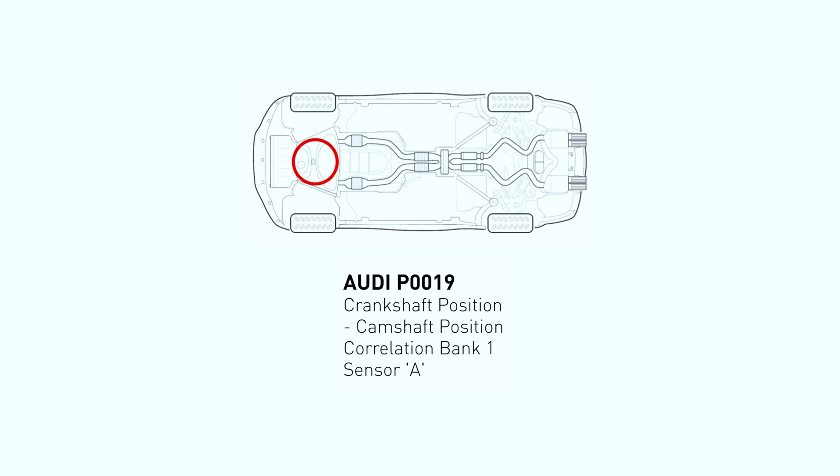Use the OBD2 scanner to scan your vehicle and see the error code P0019. It indicates that the camshaft position sensor A for bank 1 does not correlate to the signal from the crankshaft position sensor.

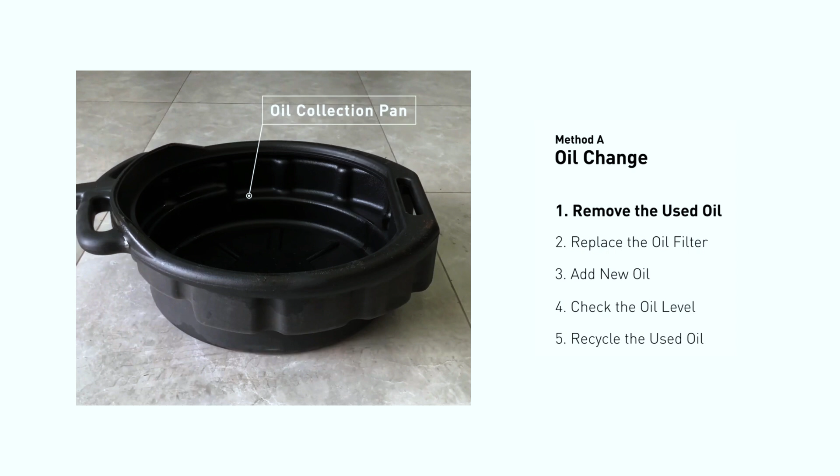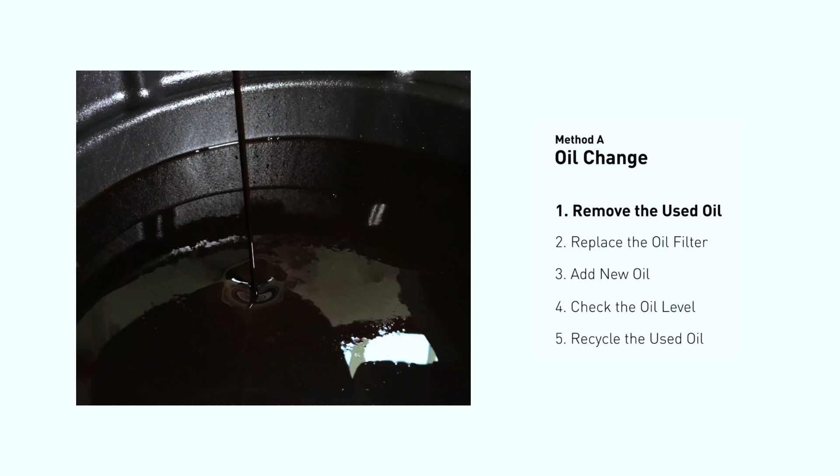Method A, oil change. Locate the oil drain plug on your vehicle and place an oil collection pan underneath it. Use a socket ratchet to remove the plug from the oil pan on your vehicle. Once the plug is removed, the oil should start flowing out into your collection pan. Once all the oil is drained, replace the drain plug and tighten it back on.

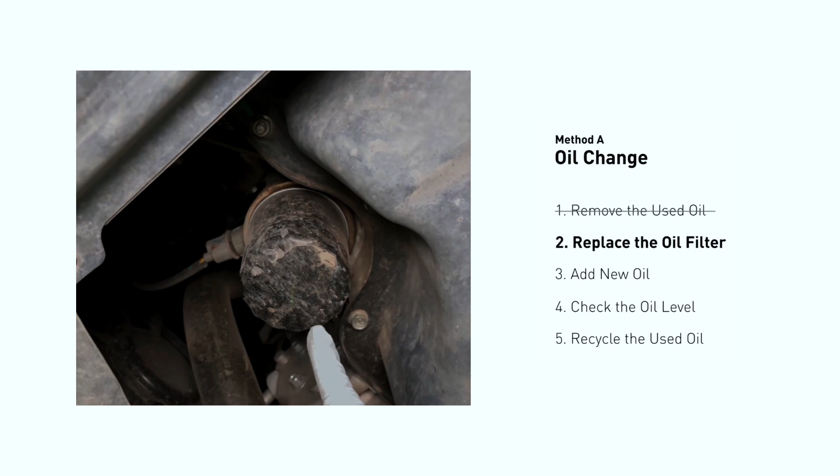The oil filter is usually located beside the oil pan or under the hood of your vehicle near the engine. Place the collection pan under the filter. There would be oil in the filter itself that could be hot, so it is important that the oil goes into the collection pan. Spread a bit of fresh oil evenly on the new filter's gasket, then install the new oil filter. Tighten the filter an additional 3/4 of a turn. Be sure not to over-tighten.

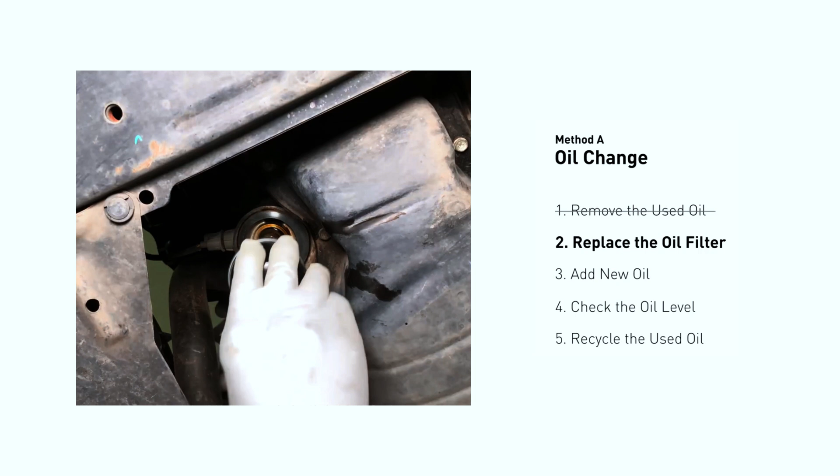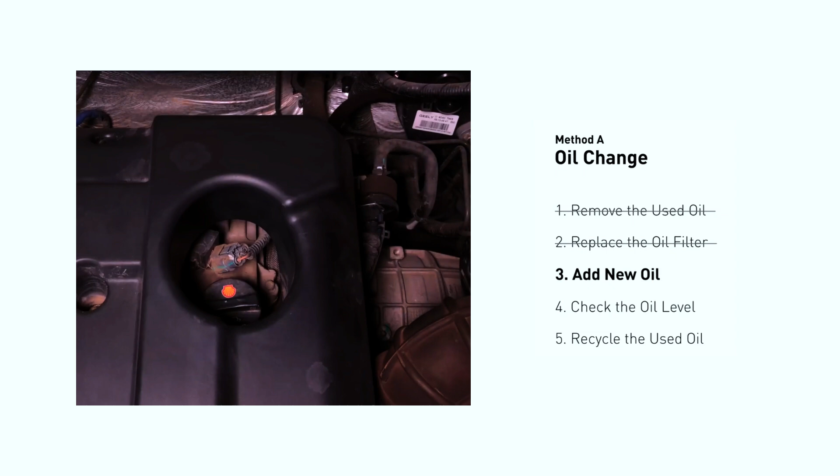To fill the vehicle with fresh oil, you should first locate your oil fill cap at the top of the engine. Clean the cap before removing it. Take the cap off and place the funnel into the opening. Add the amount of oil specified in your owner's manual, and then replace the cap.

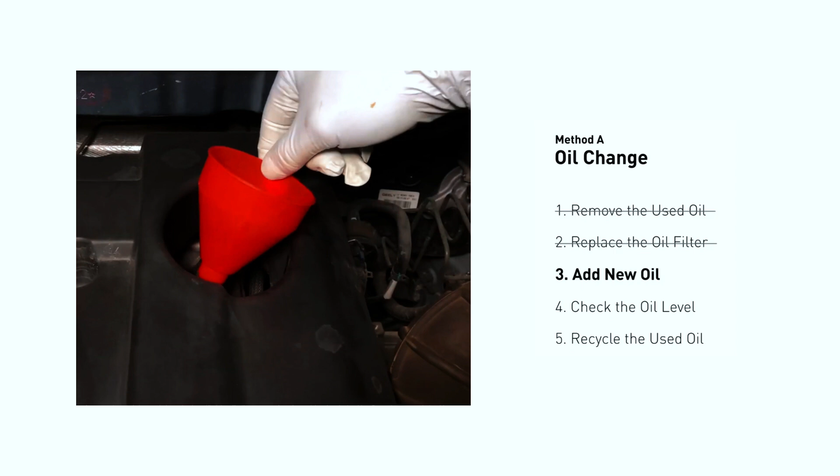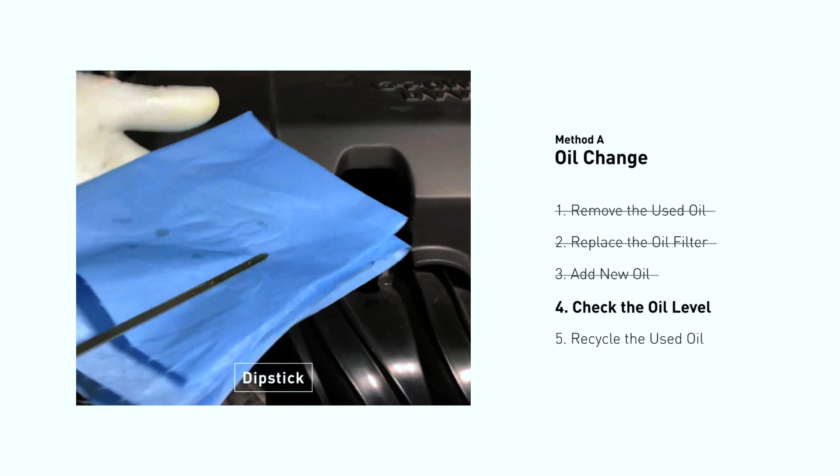After the oil change, start the engine and let it run for a minute to bring your oil pressure up, and recheck your oil level. To check oil levels, pull the dipstick out, and clean it off. Replace the dipstick, and pull it out again. The oil should be near the top dot or fill line. If it is close to the lower dot, you'll need to add more oil. If your oil levels are good, replace the dipstick and shut the hood.

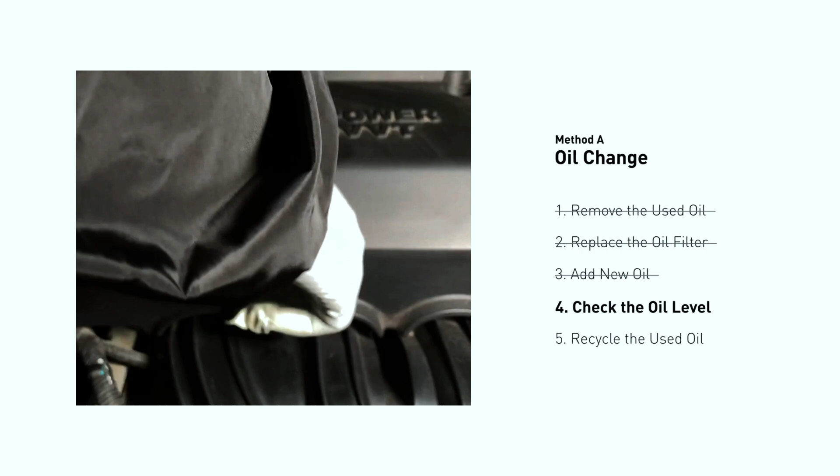Place the used oil from your collection pan into an airtight container with a screw-on cap. Make sure the oil is cooled before transferring to the container. Used motor oil can be recycled at most auto stores or at recycling centers.

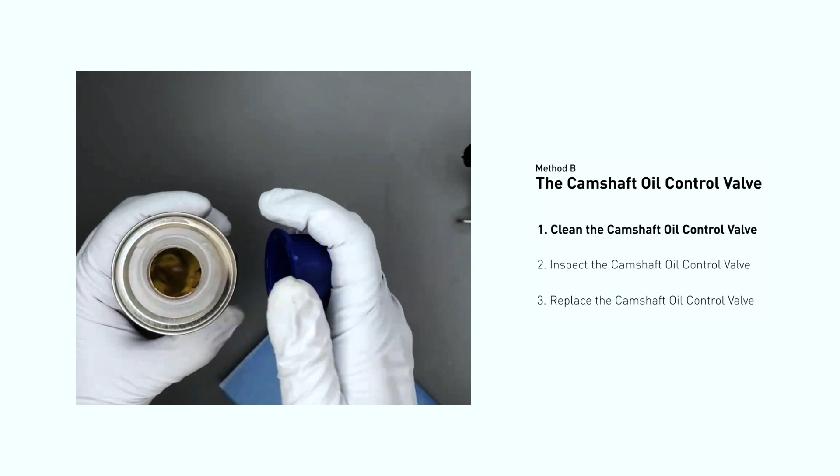Method B, the camshaft oil control valve. The camshaft oil control valves are usually located in cars that have engines with variable valve timing systems in them. First, carefully remove the camshaft oil control valve from the engine. Use a valve cleaner to clean the camshaft oil control valve.

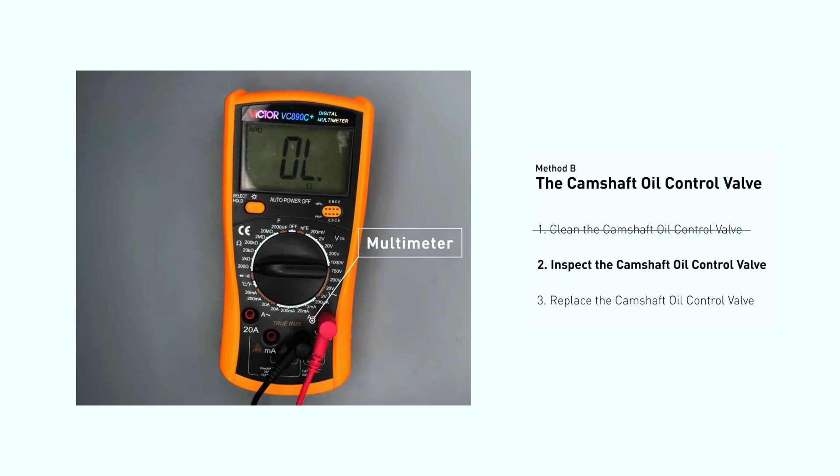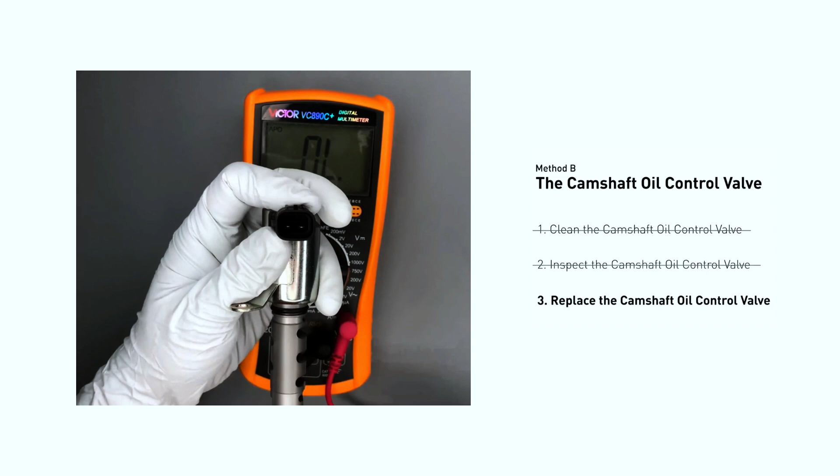Then use a multimeter to proceed with the test on the camshaft oil control valve. At an ambient temperature of 68 degrees Fahrenheit, the valve resistance is between 6.9 ohms to 7.9 ohms. If you do not get a reading, this indicates that the camshaft oil control valve is faulty and needs to be replaced.

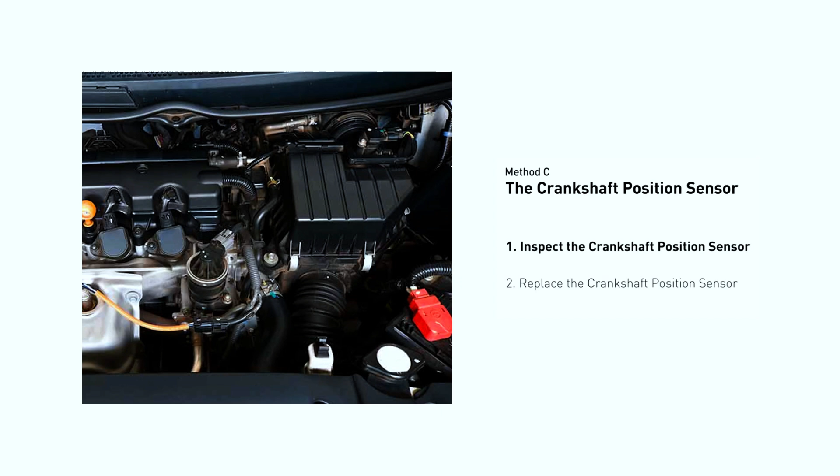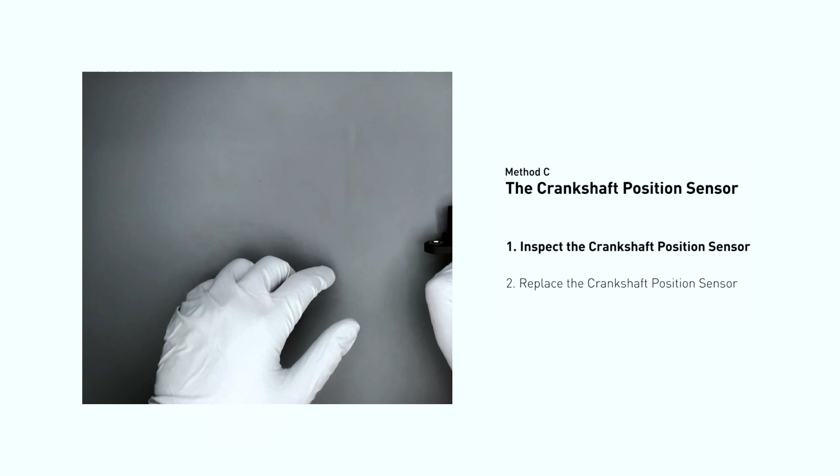Method C, the crankshaft position sensor. The crankshaft position sensor is located in the valve cover near the top of the engine, or it can be located at the front or rear of the cylinder head. First, carefully remove the crankshaft position sensor from the vehicle. Visually inspect the sensor to make sure it hasn't been contaminated by a leak from another engine component.

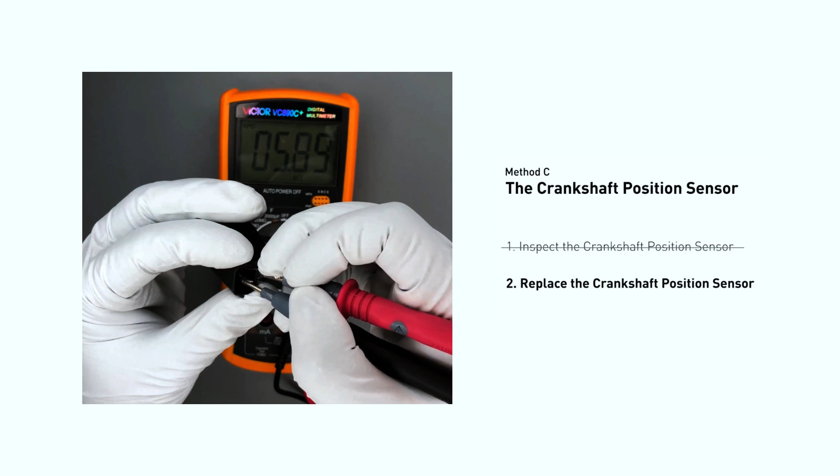Use a multimeter to proceed with a test on the camshaft position sensor in order to get a correct reading. Check your owner's manual to see the specific camshaft position sensor resistance range for your vehicle. If you do not get a reading, this indicates that the camshaft position sensor is faulty and needs to be replaced. Check to make sure the O-ring from the sensor hasn't fallen into its hole, then replace it with a new camshaft position sensor.

Method D, the crankshaft position sensor. The crankshaft is most often located on the front underside of the engine. It can usually be found mounted to the timing cover.

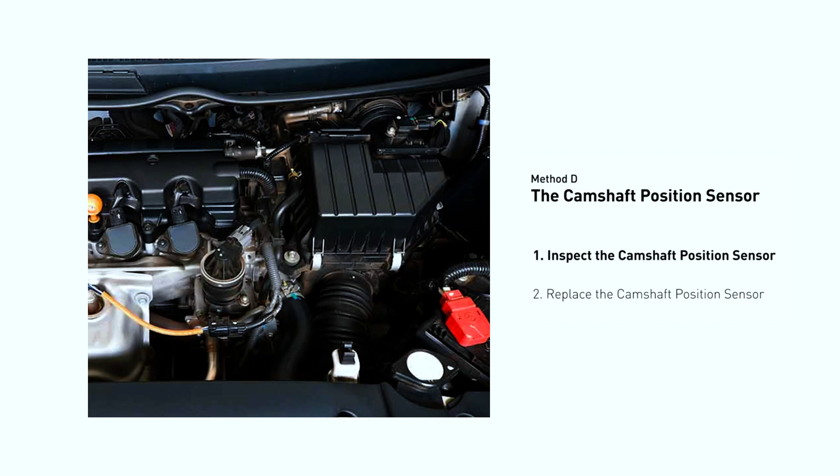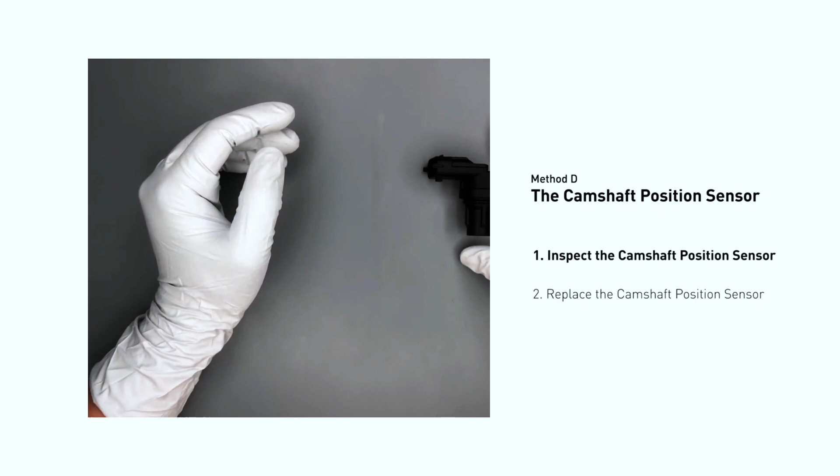First, carefully remove the crankshaft position sensor from the vehicle. Visually inspect the sensor to make sure it hasn't been contaminated by a leak from another engine component. Use a multimeter to proceed with a resistance test on the crankshaft position sensor.

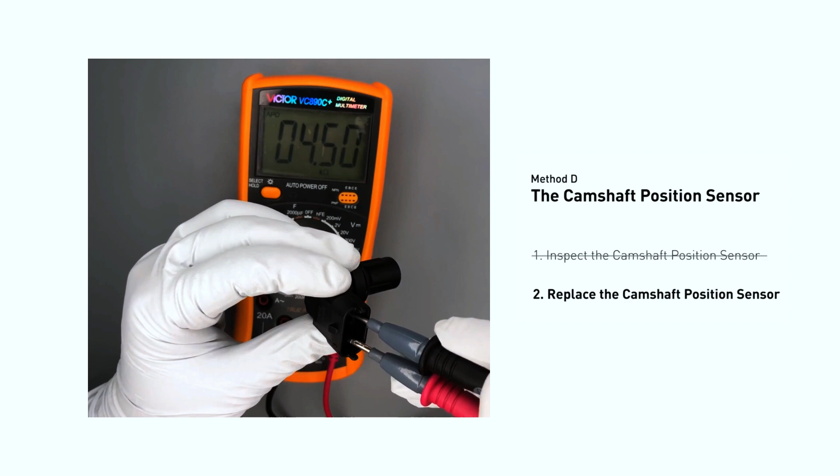In order to get a correct reading, check your owner's manual to see the specific crankshaft position sensor resistance range for your vehicle. If you don't get a reading, this indicates that the crankshaft position sensor is faulty and needs to be replaced. Check to make sure the O-ring from the sensor hasn't fallen into its hole. Then replace it with a new crankshaft position sensor.

So here are 4 of the most practical solutions to fix Audi's P0019 error code. After the repair, you can now use the OBD2 scanner to clear the error code, and tap the rescan button one more time to make sure everything is fine with your vehicle.